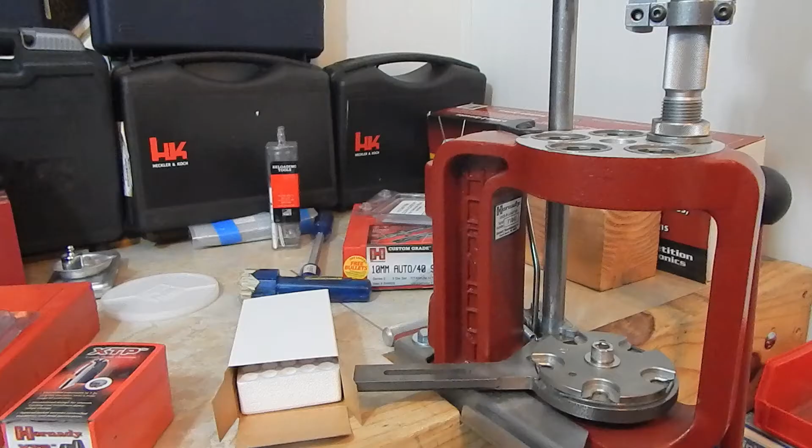Hey guys, for this video, I'm going to be setting up the Hornady taper crimp seater die for 9mm. Okay, this is the die that comes with your taper crimp 9mm Luger set. Right here. Okay, or if you buy the die separately, which I have because I have a second die that I use for loading hollow points. Since I have modded the insert in my taper crimp seater die for round nose, I've modded it for plated bullets, which I have that mod in a different video on how to do that.

Okay, so first thing Hornady says for us to do when we get our die set is to disassemble the dies and clean them completely. Okay, mine's already been done, but I will disassemble it real quick and show you what we need to do to put it back together and to get it set up on the press. Okay, before we get started with everything, some things we're going to need.

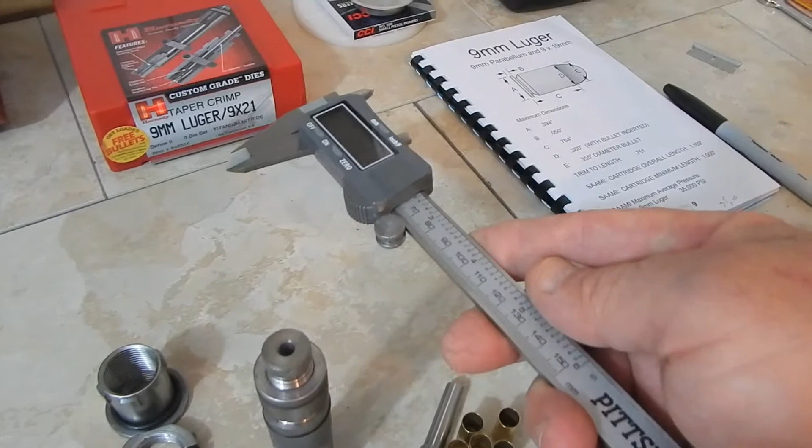Okay, of course you need the die out of your set, or out of the package if you bought it individually. Lock and load bushing with the lock ring. You're going to want to have some casings that are cleaned, ready to go, some bullets, calipers, reference material for loading 9mm. Really, this is vague. Go to the website for the manufacturer of your powder. Let's see how this will turn out on my phone. Okay, we can see this.

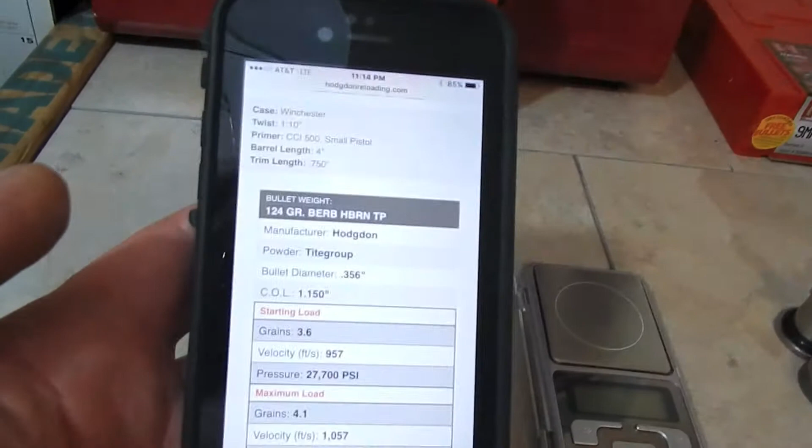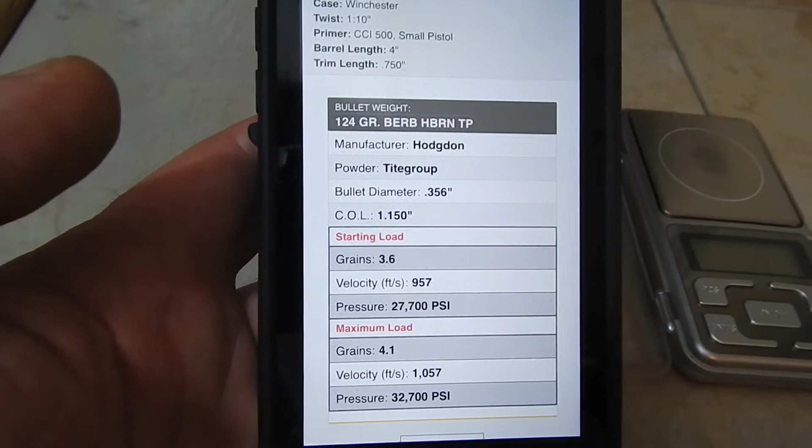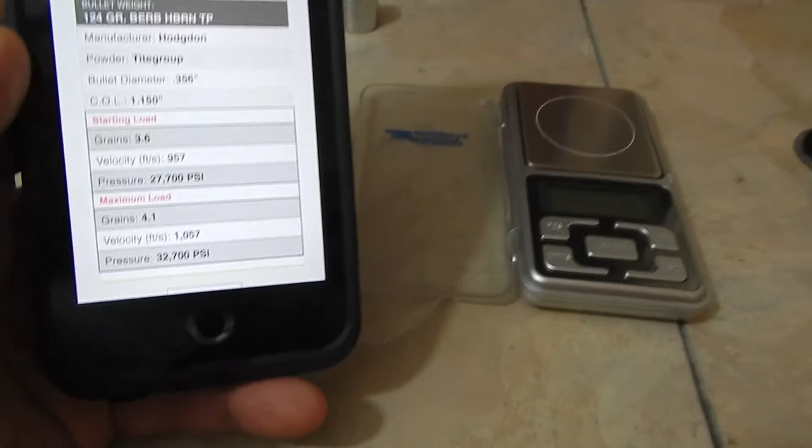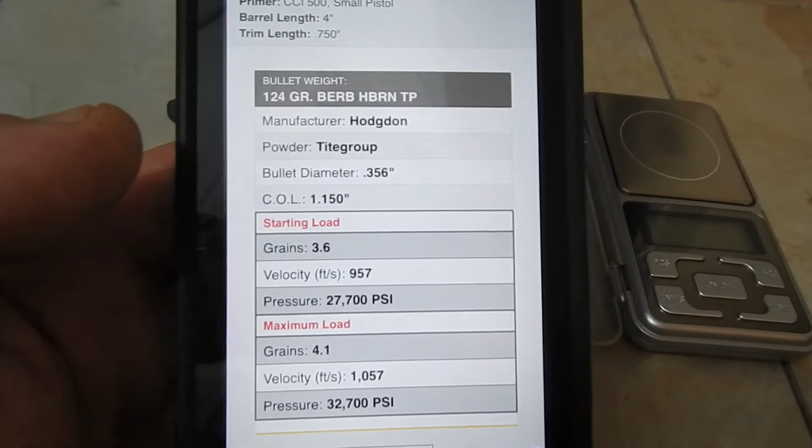Okay, I am using Titegroup. So I went to Hodgdon's website for loading data. Entered 9mm. Okay, here's my spec right here. Case overall length. That's what we're going to use as a reference to know how deep to sink our bullet into the casing. So we will need that spec. So if you're using a different powder, pull up your manufacturer's website for loading and see if you can find the overall case length that you need. Okay, mine is 1.150. Yours may be the same, but I do not know.

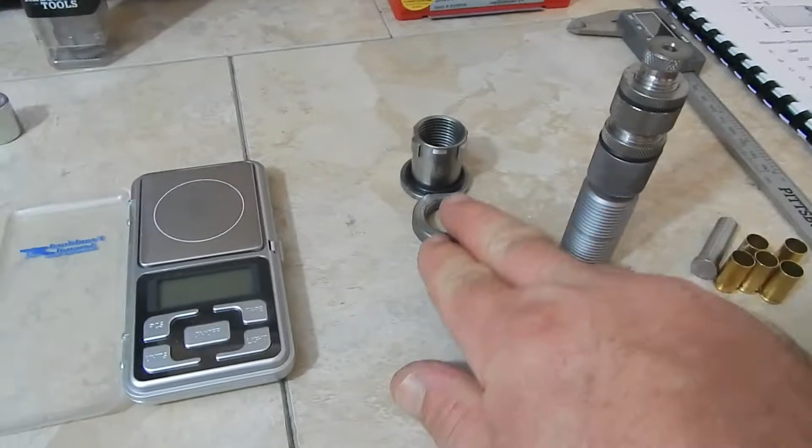This is the powder I have always used on 9mm. Haven't used any other powder, so I don't know how other people's specs are, but that's what we got for this. Also, you're going to want your powder scale, small Allen wrench for the lock bolt on the lock ring, and I believe that will do it. Okay, I want to set the camera down so I can have both hands free here, and we can take apart this die real quick to clean it if you haven't already.

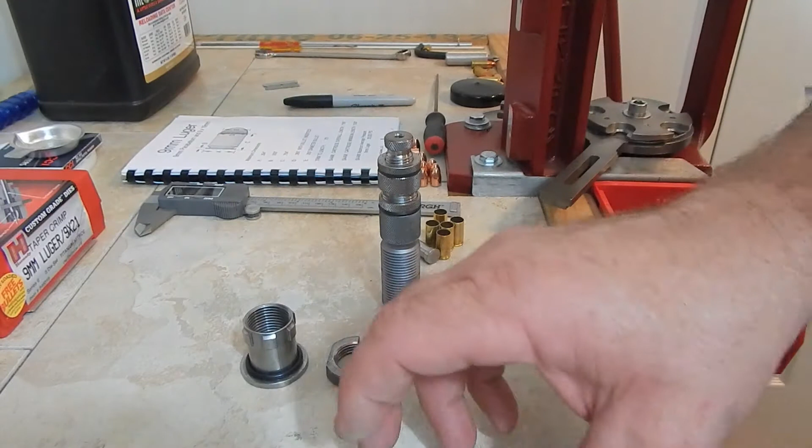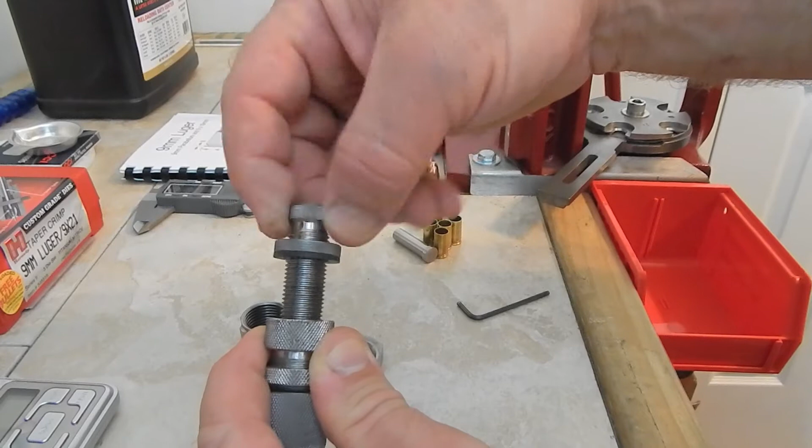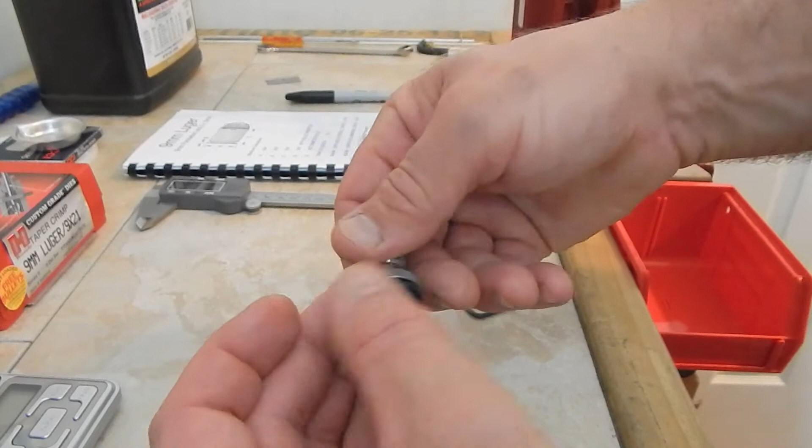There's nothing to it. Top lock ring, we just take that loose. We can unscrew the seater adjustment part of the die. Okay, you got a rubber O-ring right here that you're going to want to take off of the adjustment bolt. Just kind of spin it off of there, set that off to the side. You do not want to get any cleaner on any of the rubber pieces, causing them to swell or anything. So that bushing and lock ring out of the way.

Okay, you know, when I did mine, I just left the lock ring on here. Just moved it to a different position, ran it up and down as I sprayed it off with, I use brake clean. If you can find the Hornady One Shot gun cleaner and dry lube, that's supposed to be some really good stuff too. The One Shot seems to be pretty scarce. Every time I see it available, it's gone before I can order some. But anyway, brake cleaner works fine. Carb clean, that'll work too.

Okay, so now we're going to take the second lock ring loose for the actual crimp adjustment. And we're going to unscrew that piece as well. Take off that rubber seal too. Kind of just roll that one off here. This is more like an O-ring, where the other is a flat rubber ring, almost like a gasket on a garden hose. Okay, same here. I didn't take my lock nut off of the adjustment bolt here for the crimp. Just clean it, spray it really good.

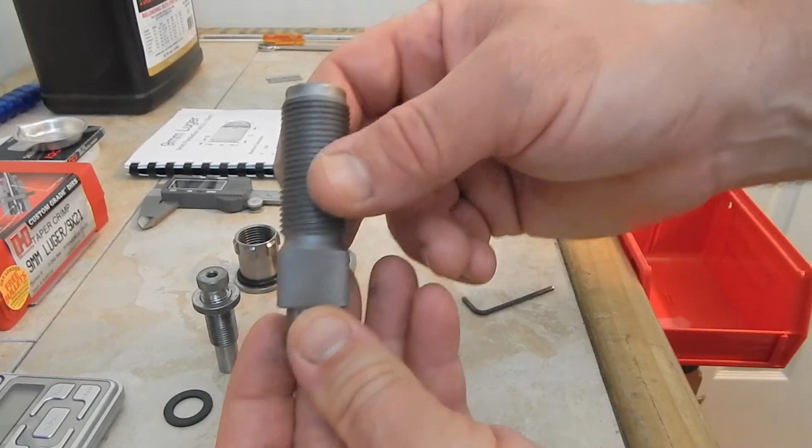Okay, now we're going to dump out the die body. A couple of different pieces here. Set the die body out. You can go ahead and spray this out now. Okay, there's no rubber pieces left in here. It's good to go to clean. Okay, then you have our actual crimp insert and our bullet seating insert that is sitting inside it. Okay, so you want to clean off both of these pieces as well. Okay, like I said, I have modded mine. You can see how it is the shape of a bullet.

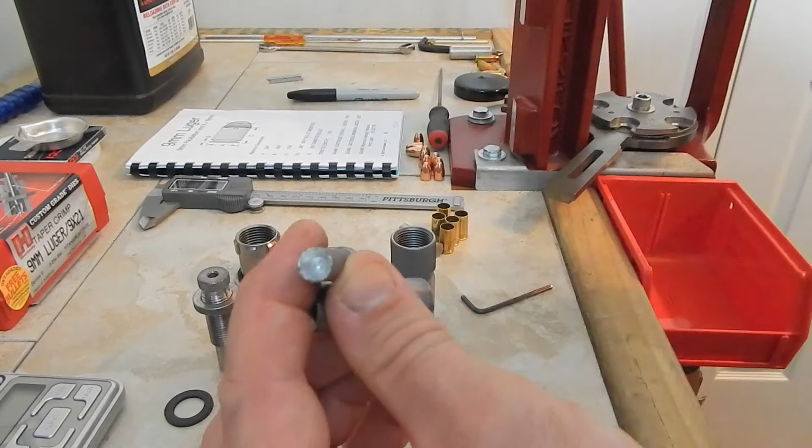It's aluminum foil, it's JB Weld up under here, and I have that video posted on YouTube as well, how to mod it for loading plated bullets without leaving a ring around the plated bullet. So this works really well. If you have done this adjustment, I don't just spray this off with brake clean. I'll spray brake clean or carb clean on a rag and wipe it. I don't really like soaking this in cleaner after doing that. I'm afraid it may not last like that.

Okay, this piece, which is actually the insert for the crimp, you can spray that off with cleaner too. Okay, so we're going to be loading round bullets. So this part, this is if you had the actual flat tip bullets that you were loading. This comes in your die set. You just set that off to the side. We're not going to use that. Okay, so let's just go ahead and put it back together like we had it.

We're going to grab our crimp insert, the wider portion upward. Grab your bullet seater insert here. Drop it right in the top of the crimp insert. Okay, now we're going to grab the die body. I'm going to drop those two as a unit right down into the die body. You'll see how they float in there. Make sure they're dropping all the way down and move freely.

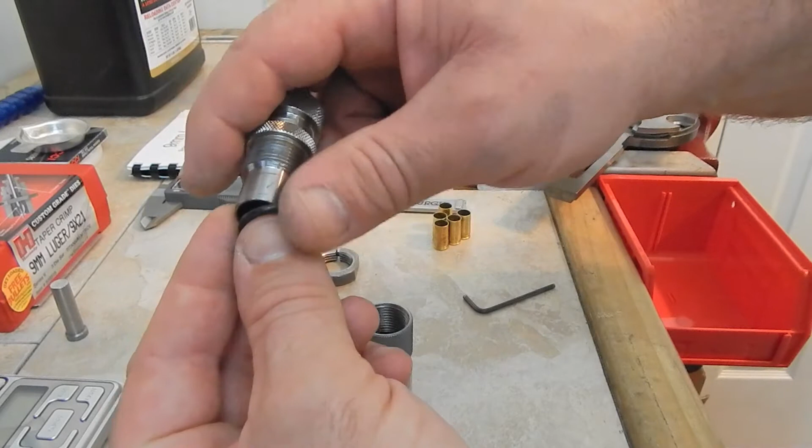Okay, now set the die body down for a second because we got to put this O-ring back on the adjustment bolt for the crimp. So we just roll that right over the top of the threads. I'm gonna back off that lock ring, kind of get it close to the top here, and push that rubber O-ring up against our lock ring.

Okay, now we can go ahead and thread this into the die body. Run it down there a little ways, but we're going to need to have this pretty high up once we get in the press. We can go ahead and run it down now, and then when we get it set in the press, we'll back off of it. Okay, let me set that back down again.

Alright, we want to grab the flat O-ring and the seater adjustment screw. Put that O-ring, or gasket, whatever you want to call it. It's more like a gasket than an O-ring since it's flat. Put that all the way up against the lock ring. Now we're going to drop that in the top and run it down a little ways. And that's all there is to putting this thing together. Nothing to it.

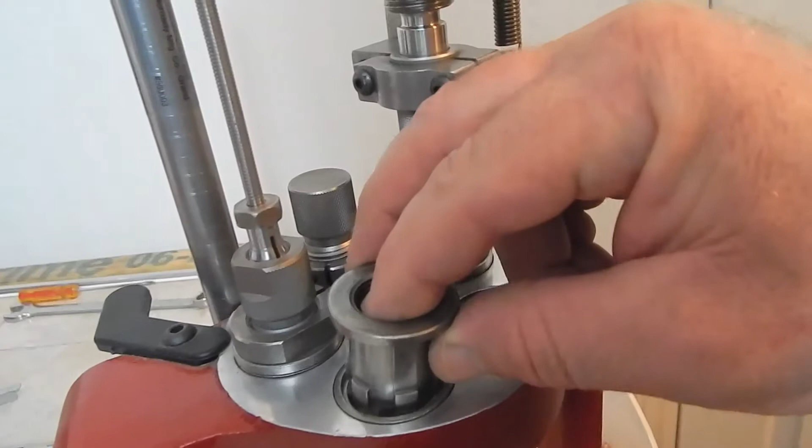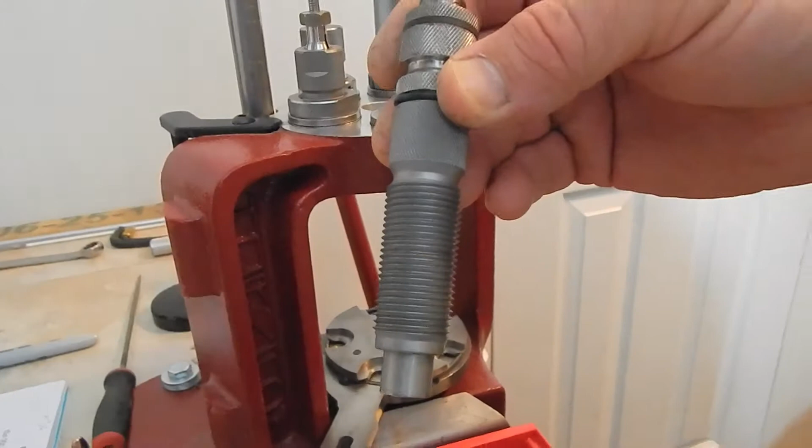Okay, so now we're ready to put this on the press. I want to position the camera where we can see the press. I'm going to go ahead and grab one of our Lock-N-Load bushings, put it in the 5th stage, and lock it in. Okay, now we're just going to start our lock ring onto our die. So grab your bushing lock ring, and we're going to just run that onto the die.

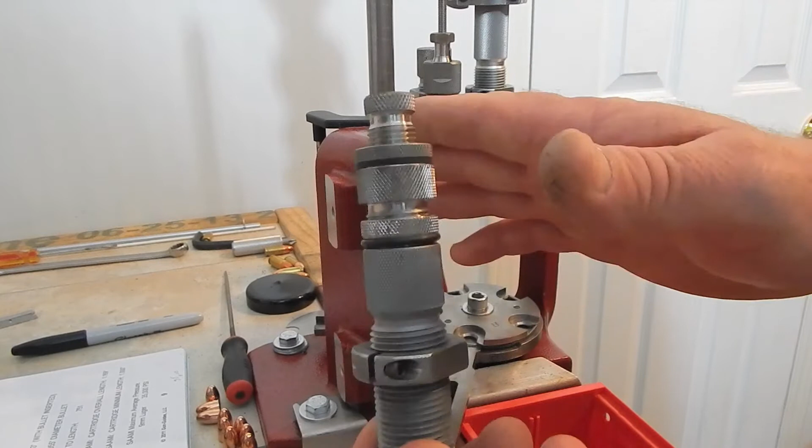And the die body on this, you know, all the other videos I've done about setting up your dies, I did it with 40, loading 40, and it's straight across the board. It's the same thing on the 9. This die here is where they part ways. It is a different setup than the 40 Smith & Wesson seater die. You have two different adjustments on this die. And then you also have the die body, where you set the depth of the die body, where on the 40 you're setting your crimp with the die body, and you have a seater adjustment on top. So it's a little different.

Okay, after a quick battery change in the camera, we're back in business.

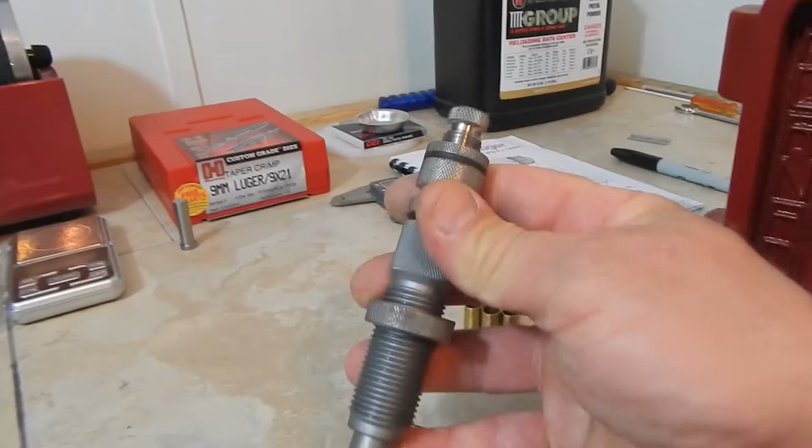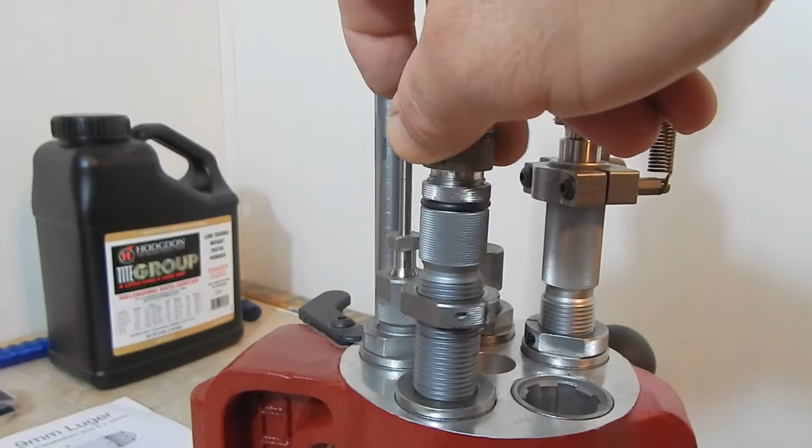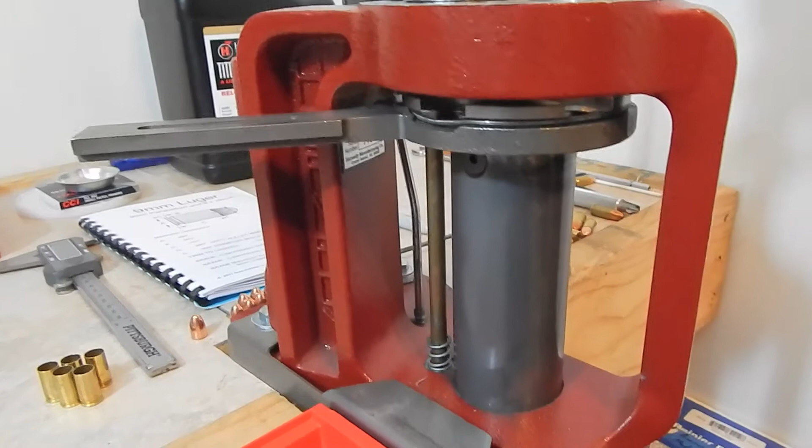Okay, we're going to grab our taper crimp seater die. We've got our Lock-N-Load bushing in the 5th stage of the press. And just set the die top of the bushing and get it started for now. Just run it down a little bit. Okay, now we want to index our press. We want to get the shell plate up at the top and leave it there to set the depth of the body of this die. So we're going to index the press, leave the handle down where the shell plate is up.

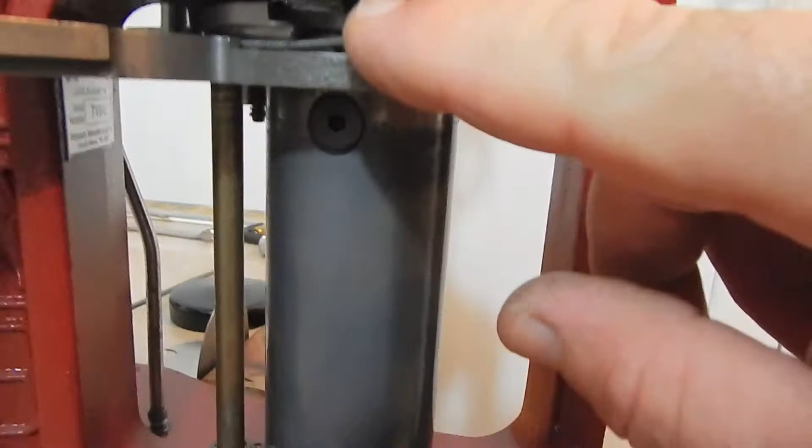Okay, now what we want to do as far as setting this die, we're going to screw it further into the bushing while paying attention right here. We're going to back your lock ring up where you have plenty of room to run this die down into that bushing. Okay, now we're going to start screwing it down, or turning the die.

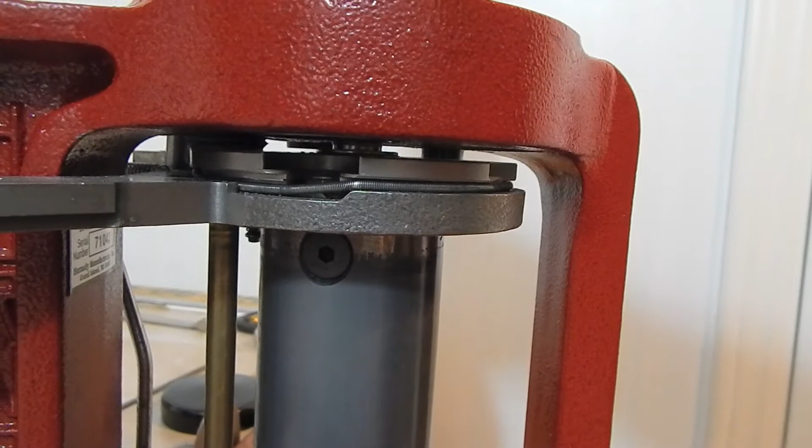We're going to start screwing it further into the bushing while looking right here for the die body to come through. So keep tightening, keep running the bushing down, and we're going to start seeing, okay, I'm starting to see the actual seater and crimp inserts coming down.

Those will telescope up into the bushing, back up into the body of the actual die here. Those will telescope back up in there. So until you feel resistance of the body of the die contacting the shell plate, just keep tightening.

You will see actually a wider portion start coming down as you start getting close. Starting to come into view now. Okay, I gotta back off my lock ring more. Didn't back it off far enough. Okay, keep running it down.

There it is. Okay, and you're gonna watch the shell plate, because it's spring loaded, it's got little springs under the detent balls under it. Okay, when I actually have pressure of this die body on that shell plate, you'll actually see it move a little bit right there. Okay, so as I feel it contact that shell plate, I want to back off just a little bit. Go to where it contacts, back off just slightly.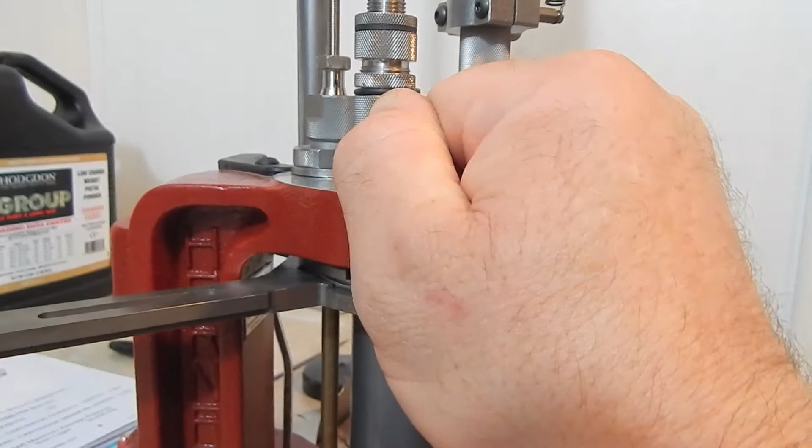Back to where it makes contact, back off just slightly, hold the die, turn the lock ring, and tighten down the lock ring with your fingers. Okay, now you can grab your small Allen wrench and tighten the set screw in this lock ring here. So I'm going to go ahead and run that in. And the die body portion is set.

Cool. Okay, so now let's grab our lever, pull the lever back up and bring the shell plate back down. Okay, now you can see here's our die. Cool. Alright, next part of this, let's back off.

We've got our seater adjustment backed off a pretty good ways. Let's get that where it's almost out of the threads here. Back this lock ring and gasket off a little bit, where it's almost out of there. So just up there pretty high, so it's not going to make contact with anything until we get ready to do an adjustment on there. Okay, because we're going to do preliminary settings for the crimp, and then we'll go in and we're going to set the bullet seater adjustment depth.

So right now we want to back off the lower of the two lock rings now. Back off that ring, run that portion out a pretty good ways. I've got it out probably about, I'd say about a ½ inch from the bottom of the O-ring to the die body here.

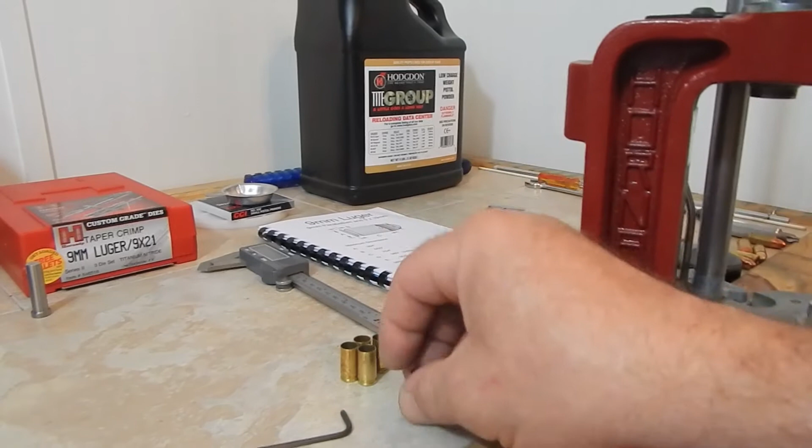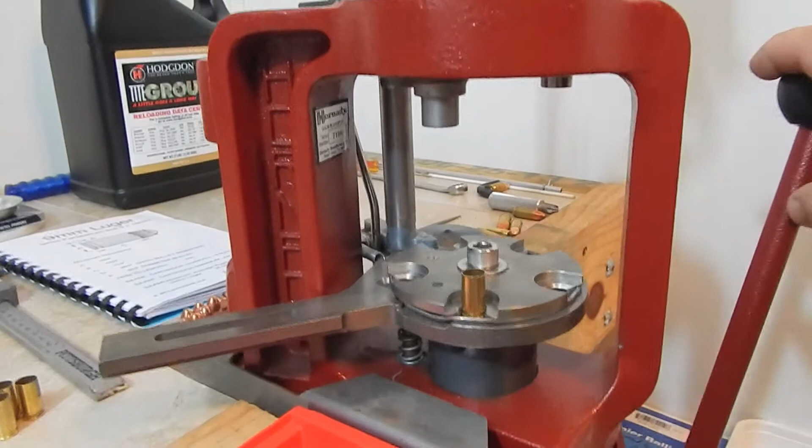Okay, that's probably good. Okay, so right now I'm going to grab a casing. Doesn't matter if it has a primer or not. This one actually does, but I'm going to set it in the next position that's going to be up for the seater die. We're going to run that casing up. Leave the handle all the way down again, where the shell plate is all the way up.

Okay, now we're going to turn this portion, which is the crimp adjustment, start running that down. And you feel there is no resistance on it. It's just turning right now. When we feel resistance, that means we have made contact with the casing. Okay, so that's what we're looking for. We want to run it down till it touches the casing.

Okay, I just touched it. And right at the point where it's touching, I want to stop turning it. So I'll back off and feel it's free. Go back. Okay, right there's where I'm making contact. So this is just a preliminary setting, because we will go back and do a fine-tune adjustment on it, but I want to set the camera down for a second so I can do this.

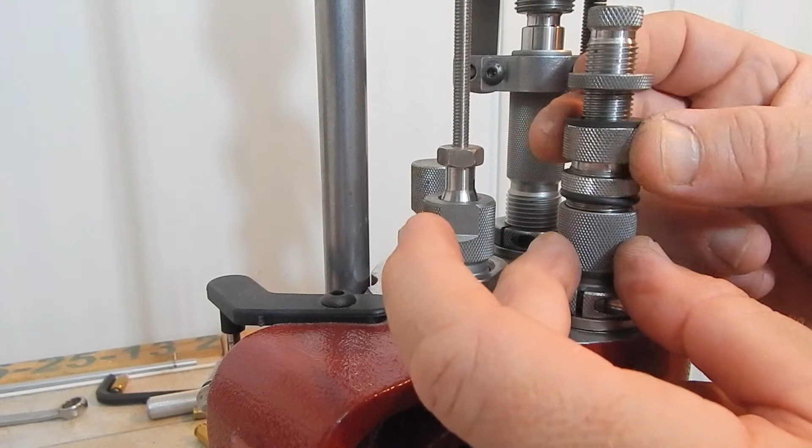Okay, right where it makes contact, we're going to tighten this lock ring here. And we don't have to crank on it because we've got to come back and do this again in a second anyway. We're going to have to come out and put just a slight turn on this after we get this bullet seater adjustment set.

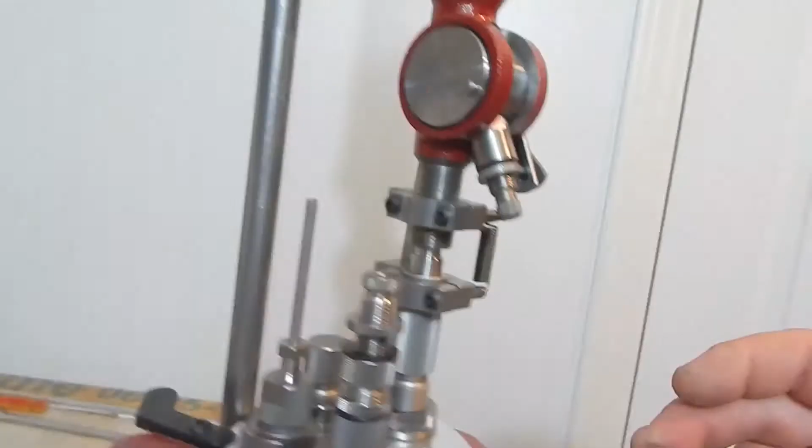We're going to have to come back and turn just this adjustment in slightly to put our crimp on our casing. So I'm not really going to crank on this too much right now. Alright, I've got that set. So now we're at the point that we're going to go ahead and bring our shell plate back down.

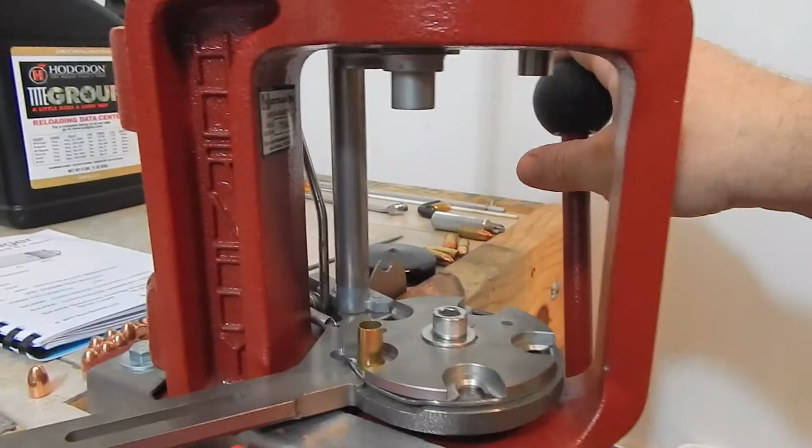And grab our casing. Okay, we're going to have to go through the process of making a bullet now. So I'm going to turn on my scale, get that ready. I'm going to put a casing in the press. I'm going to run it up. I've got my depriming pin backed way off so it can't deprime it. So I'm going to go ahead and run it up through the sizer. It has a primer in it, so I don't need to prime it.

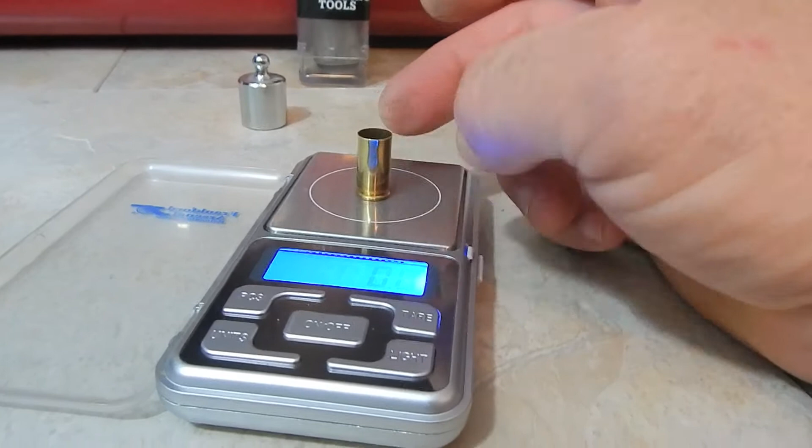I'm going to go to the next stage, which is the expander. I'm going to stop right there. I'm going to bring it over to my scale. I'm going to zero my scale out. Put the casing on there, hit the tare weight button. I'm going to put it back in the press just for the stage before the powder measure, charge it with powder, cycle it around, and measure my powder. It should be 3.9. That's what I need. 3.9, right on the money.

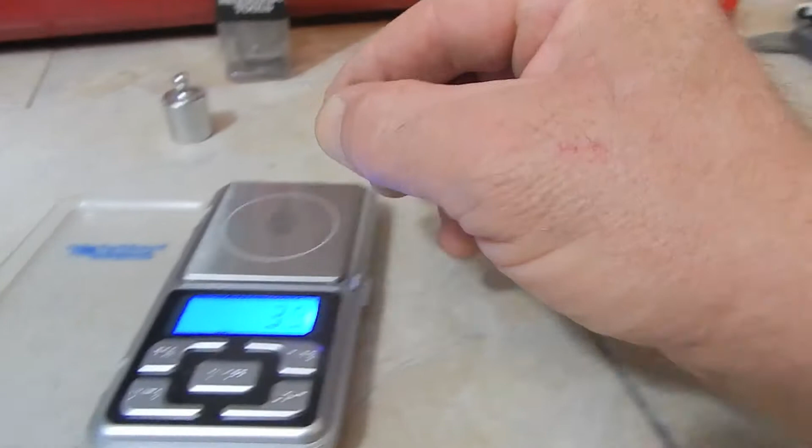Okay, and I'm going to put it back in the position on the shell plate that is next up for our seater die. I'm going to grab a bullet, set it in the top of the casing, and go ahead and run it up. Okay, now we're going to do the exact same thing we just did on this adjustment with the seater adjustment. Back off your lock ring so you have room to mess with it. Start turning it until you feel it make contact on the bullet. Back off my lock ring a little bit more. I just felt it make contact. I'm touching the bullet right now.

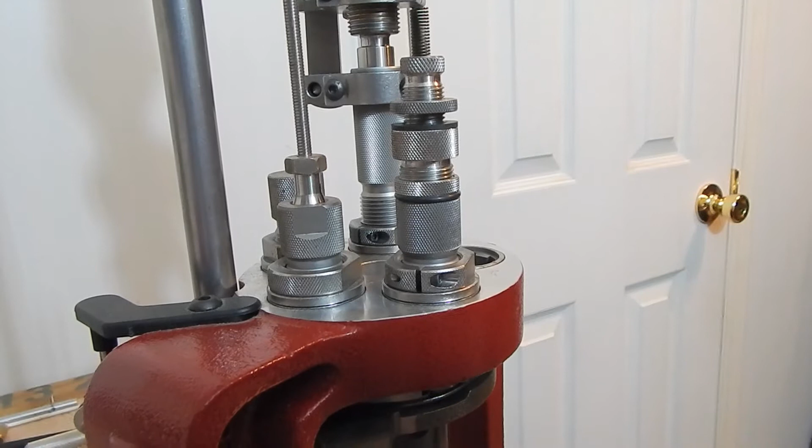Okay. Now, I'm sure there's about 20,000 different ways to do this, so I want to show you mine. Let's see if I can zoom in a little bit. And get out of the light. Okay. So what I'm going to do now, since we have charged our bullet already, there's powder in it, we don't want to kick that bullet out into our tray without it seated in the casing and dump our powder everywhere. Okay, so that's why I want to two-hand this thing.

I want to slowly bring the shell plate down, and then I'm going to hold the lever without bringing the shell plate all the way down. I'm going to bring it down probably, I don't know, a couple inches right there. And we still have our adjustment loose with the seater right here. Okay, I'm going to give that 2 half turns in. And we're just trying to get the bullet set in there right now so we can get a measurement on our case length and then adjust it closer from that point.

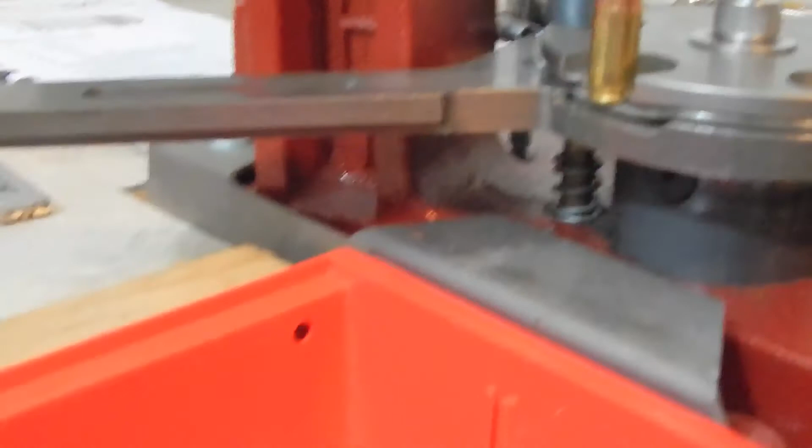So now that I've gone 2 half turns in, after backing down on the plate a little bit, I'm going to go back down with the lever so it pushes that bullet into the casing. Now we're cool to go ahead and cycle it down, bring our lever all the way up, and let it kick it off into our bin. Okay, set the camera back down now so we can do our measurements.

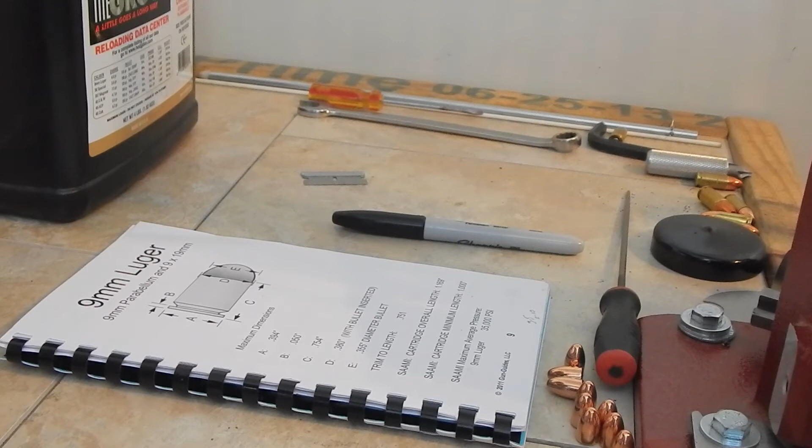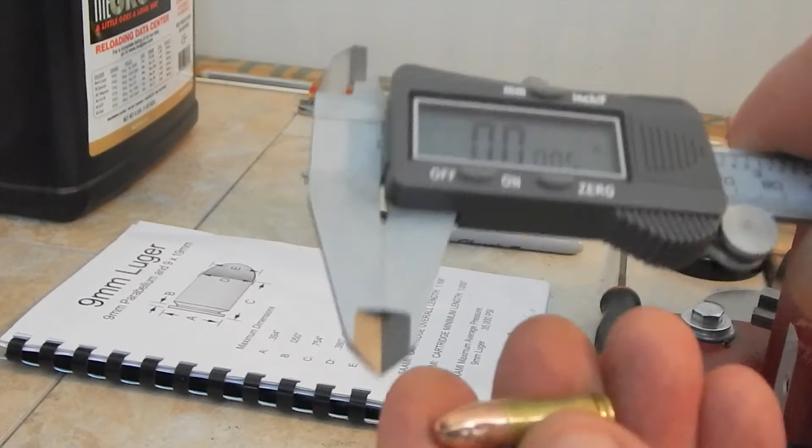Okay, now if you know your spec for your case length, and like I said, mine is having to cheat and look at where I pulled it up, 1.150. So turn my calipers on, zero them out. Okay. Now, it is normal in the beginning to be way off. Okay, and then we'll have to run it in. 1.1975. Okay, not terrible. I probably won't even go half a turn in on this.

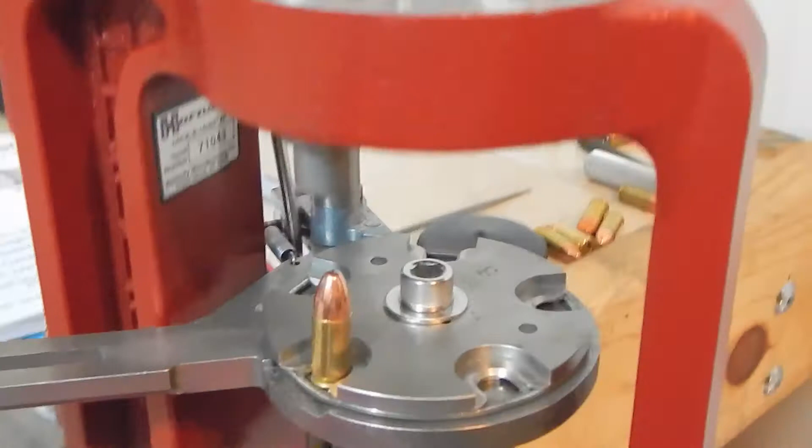So, we're just going to do the same thing we did, except now we don't have to worry about it dumping powder out. That's what's cool here. Okay, so we're going to put it in the slot next up for the seater die. Let's go ahead, and I want to run mine in half a turn, and I'm going to punch it right back through and remeasure. And that's pretty much what this process is. You're going to keep doing this until you get down to your spec.

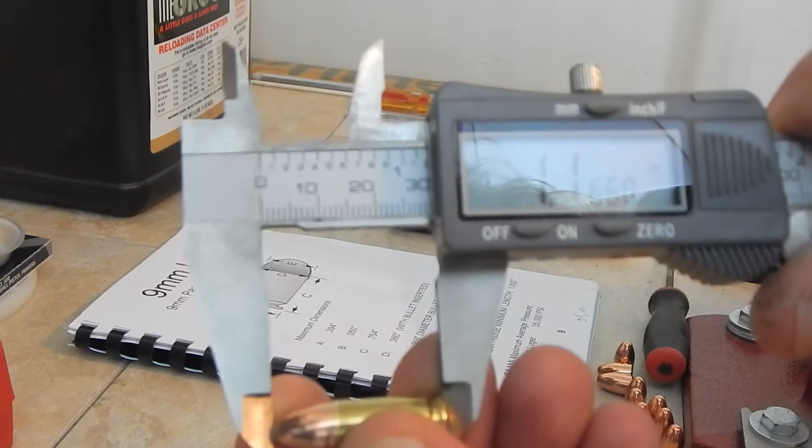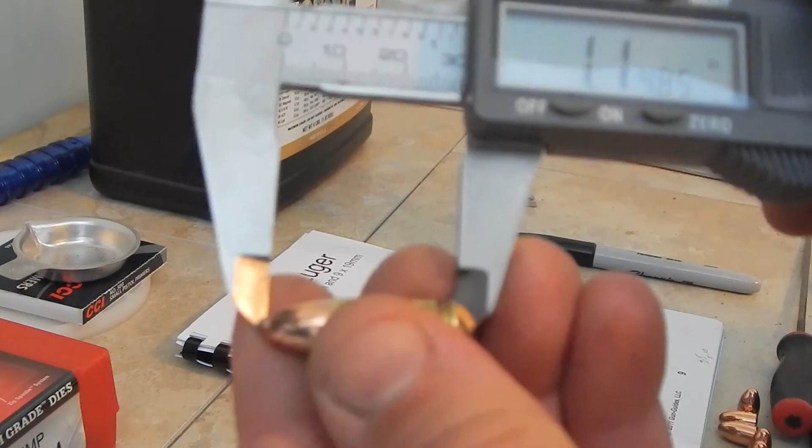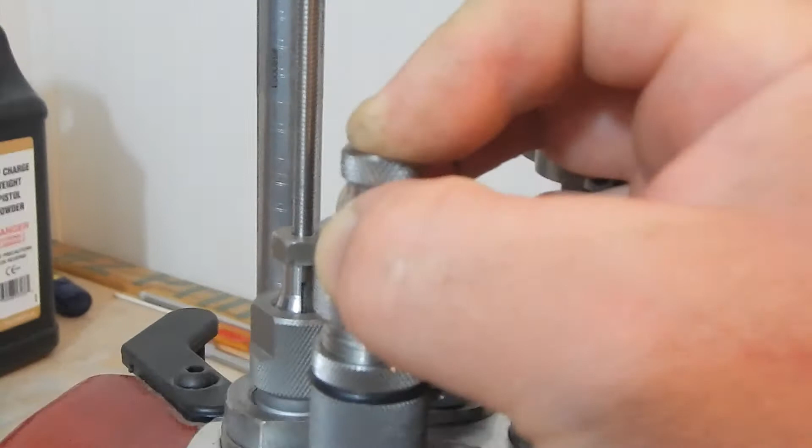Okay, now we're getting very close to my spec. 1.156. I want 1.150, so this is going to be a very, very slight adjustment. Just about like that. I don't know, I may have turned that in 1/8 of an inch. And I'm going to go ahead and spin this lock ring down where it's kind of holding this adjustment snug, since I've got it so close to where it needs to be.

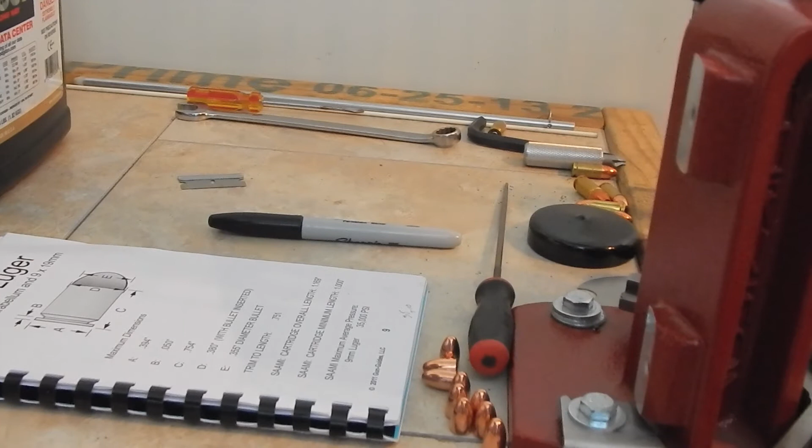I'm going to put this bullet right back in the stage next for the seater die. We're going to run it up there again and measure again and see where we're at. But we're close now. Okay. 1.1495. Okay, that is very close enough for me.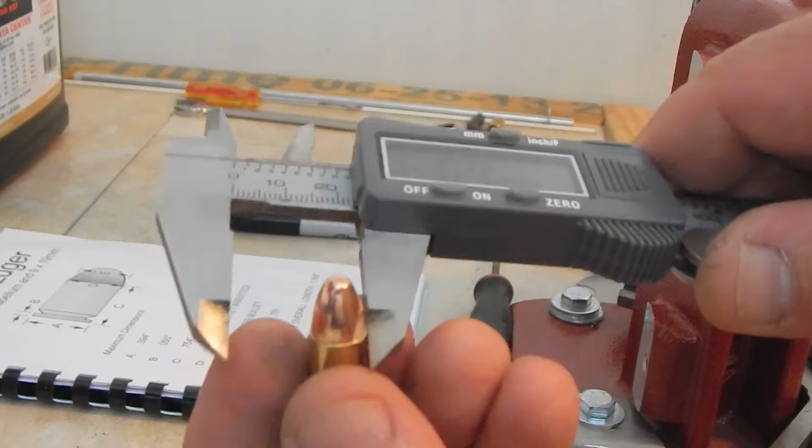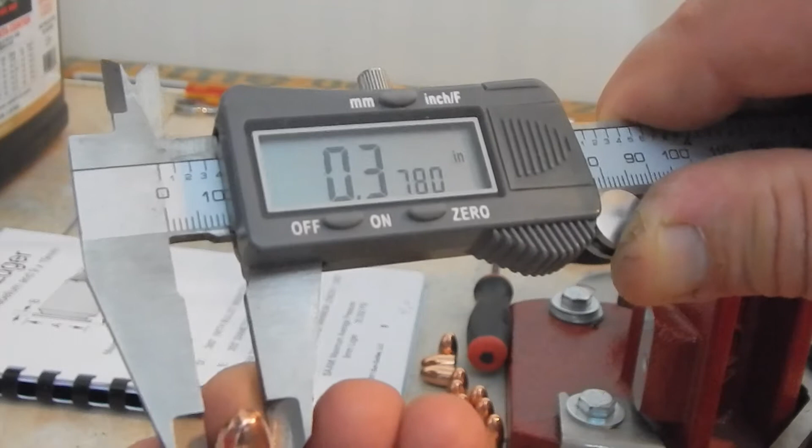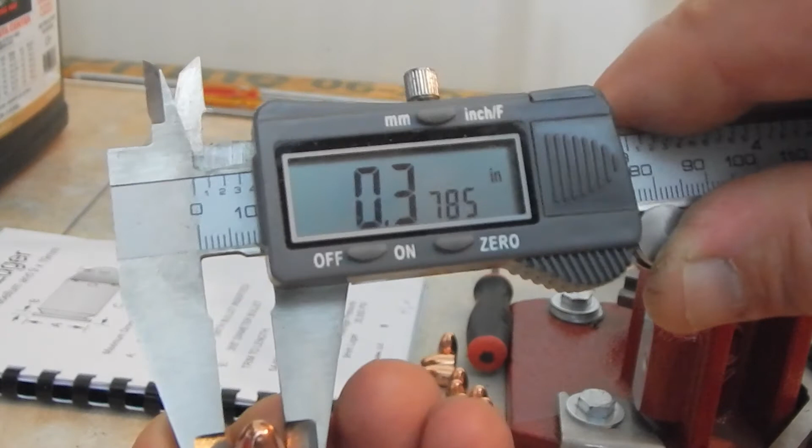Okay, so good deal. Now let's measure the case mouth with the bullet inserted in. Our adjustment on that is 0.380. We should be really close. 0.377 to 0.383. You do not want to exceed 0.383 or it may not chamber. Okay, so I'm at 0.3785. That is good right there.

Okay, if this measurement was over 0.383, then what we would need to do is go to the seater adjustment, back off this lock ring, and tighten this slightly. Just screw it in just slightly, and then after you do that, you have to remeasure the depth of your bullet again, just like we just did on the seater adjustment.

Usually it doesn't change it much because you're not making major adjustments here, but it might change it slightly, so you need to go back, make a bullet, and measure both the case mouth and the overall length, and make sure you're within spec. Now this one's in spec. We're at 0.378. That's cool.

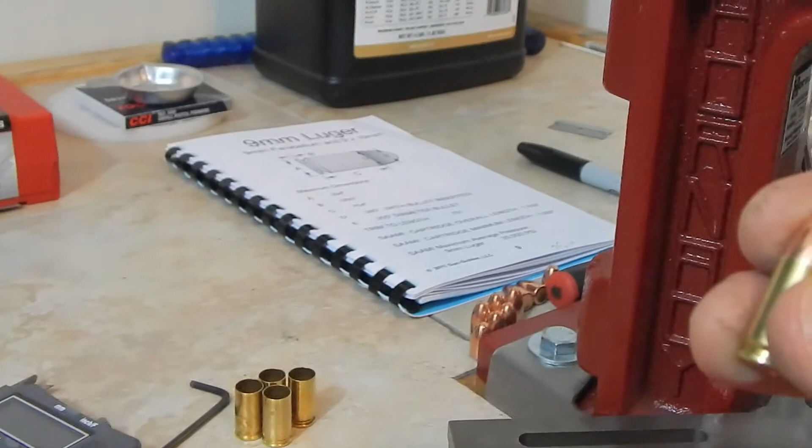Like I said, I talked with Hornady on this, with their technical. An issue I had originally with one of these dies was when I ran the shell plate up, I had a bullet in there, when I seated the bullet and went to come back down with the shell plate, it would stick. A serious pop. What technical told me from Hornady is that I had my crimp adjustment too tight. They said really, the crimp adjustment is pretty much an aesthetic thing anyway.

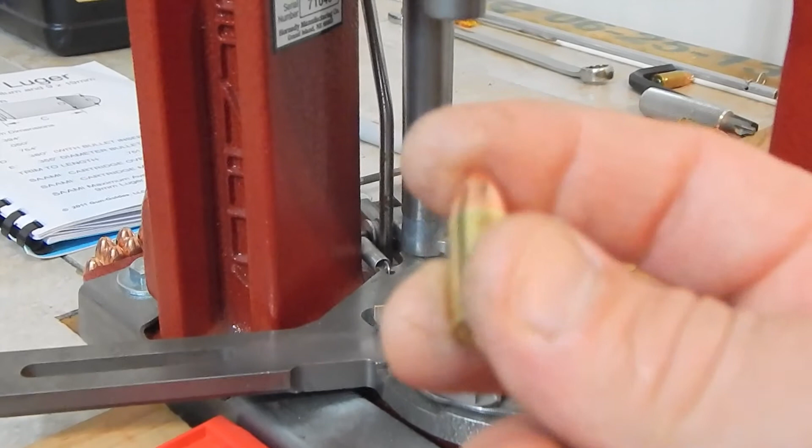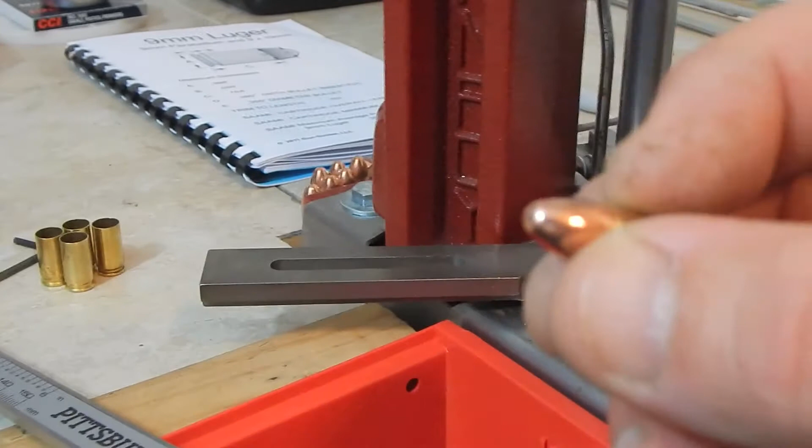But you know, hey, I want the slight taper crimp. That's why I bought this die. So they were telling me that as long as we are under 0.383 on the case mouth with the bullet inserted, we should be good to go. Should chamber. So this 0.378 is great. I'm good with that.

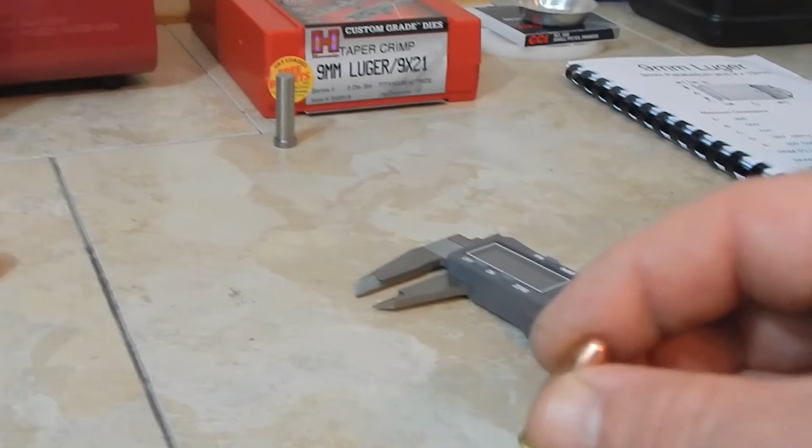So what we can do now is tighten down both our lock rings. Set the camera back down. Tighten down both our lock rings. Okay, now this is what I like to do, just because this bullet has been pressed and pressed and pressed when doing our adjustments. We're going to start fresh.

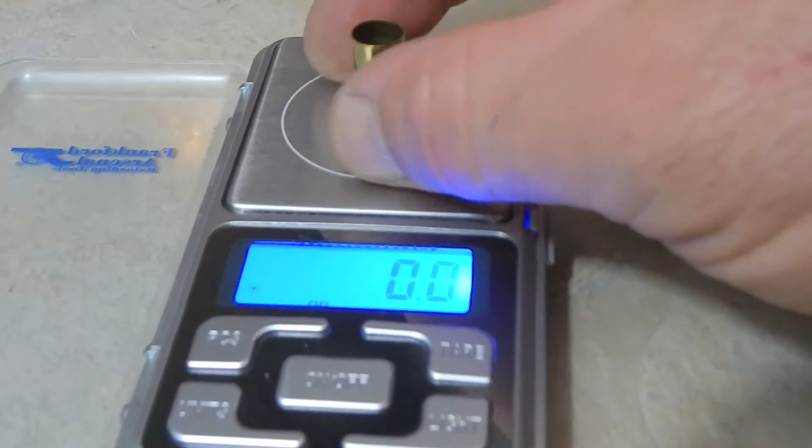Grab another casing, put it in the press, go up to the sizer die, prime it, expander die, take it out, weigh it, get tare weight, clear it out, put it back in stage right before the case activated powder measure, run it up, charge it, cycle it over here where I can pull it out, and weigh my charge. 3.9, exactly what I want.

Set it in the stage of the shell plate, next in line for the taper crimp seater die. Grab us a bullet. Set it in there as straight as we possibly can, and run it up into the taper crimp seater die. Okay, now I want to measure this one. See if these measurements are consistent with the ones we had when we were adjusting the die just a minute ago. So I want 1.150 on my length.

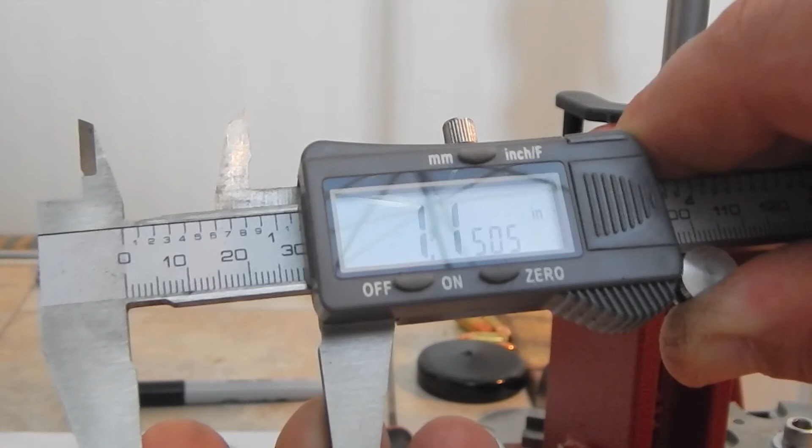Whoa, slipped off of it. Okay, this one says it's just slightly longer. I was 1.1495 a while ago. This one's 1.1505. Still good, but you can see what I mean. It changes just slightly. It's tightening those lock rings, or maybe from repetitively seating the bullet in that other casing we pushed it in a little further than what it would go on a fresh casing. So that's why I want to go back and measure this stuff.

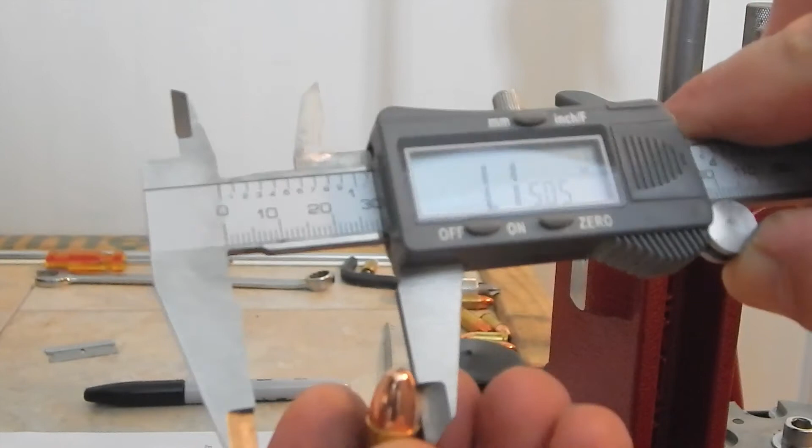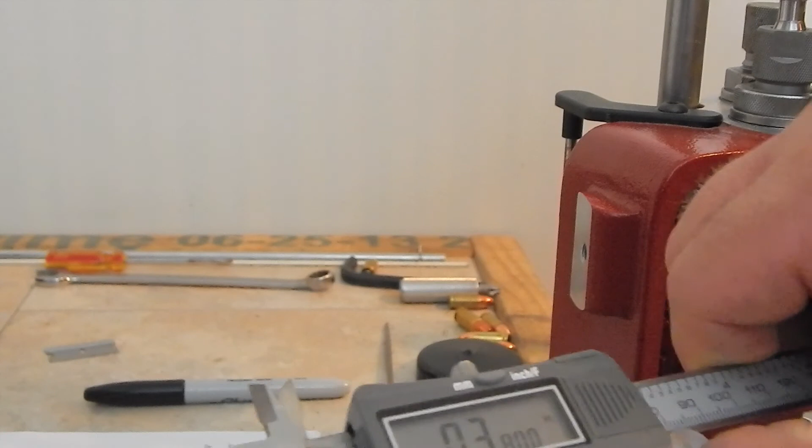Okay, so we're good there. Measure the mouth of this bullet. 0.3785. Okay, case mouth. There we go. Yeah, 0.3780. Okay, so we're good there, as long as we're under 0.383. So we have made the perfect bullet. And that's all there is to it.